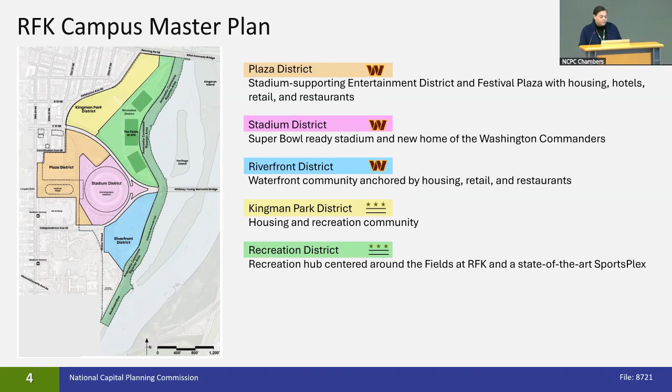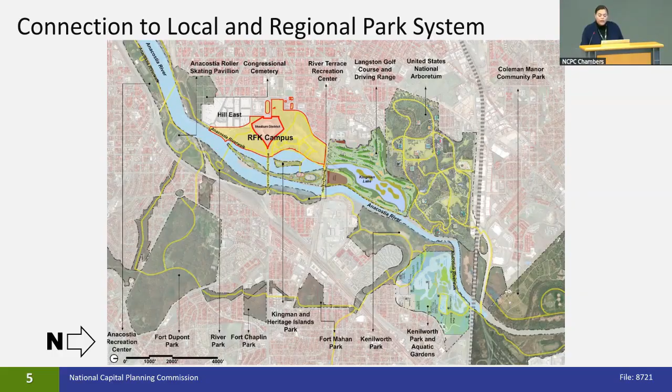The campus is located along the system of NPS-controlled parklands bordering the Anacostia River. The RFK Campus Revitalization Act requires the district to ensure that development does not adversely impact NPS lands and to designate a 200-foot wide buffer along the river as a riparian zone. The stadium project site is approximately 30 acres within the overall RFK campus.

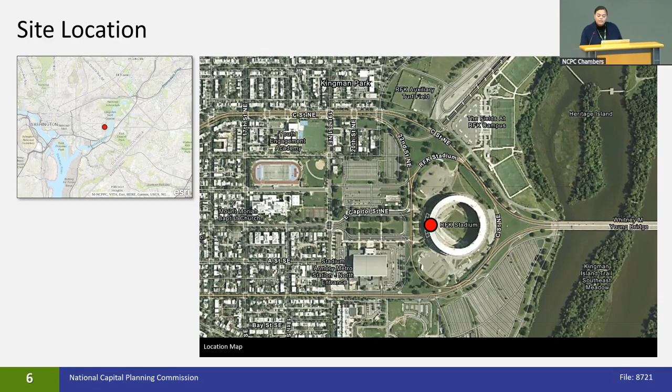NCPC has long recognized the significance of this site as identified in the Legacy Plan, Monumental Core Framework Plan, and the agency's 2006 RFK Stadium Site Redevelopment Study. Of particular interest to NCPC is the project's potential impacts to the system of streets, public spaces, and important view sheds within the L'Enfant City, namely East Capitol Street as a prominent gateway and major axial corridor. Impacts on NPS lands and adjacent federal facilities were also evaluated, along with general consistency with policies set forth in the federal elements of the comprehensive plan.

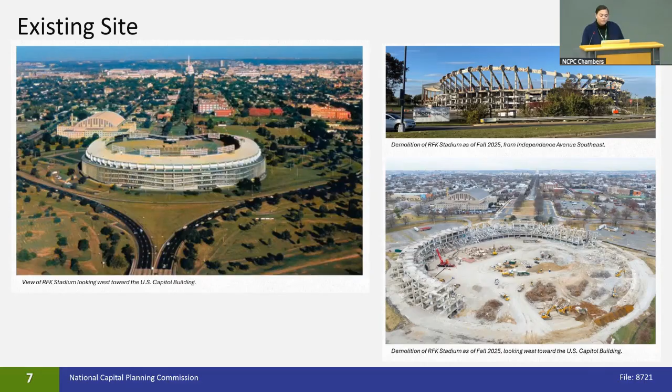The proposed project will replace the original RFK Stadium, which officially closed to the public in 2019. Demolition began in late January 2025 and is anticipated to be complete by the middle of this year. With that, we will dive into the proposed stadium concept. The applicant team has identified several design drivers, which I will walk through over the next few slides.

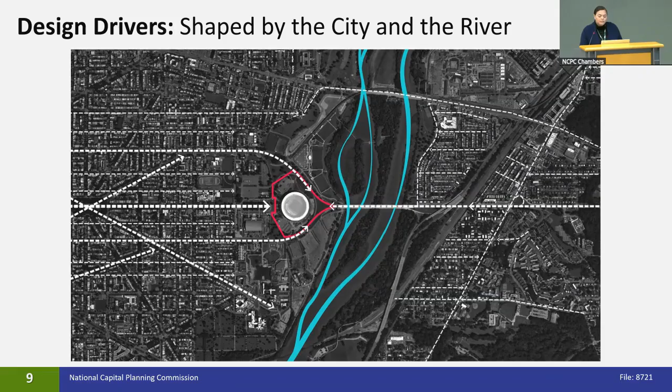First, the landscape strategy bridges the formal historic urban fabric to the west and the river ecology to the east. The site is also meant as a destination and a place to gather for locals and the region.

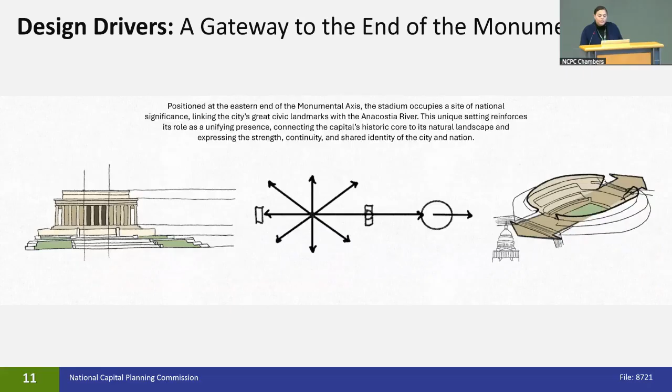The stadium is positioned along the East Capitol Street axis, linking to the Capitol Building and Lincoln Memorial within the monumental core. The roof form raises to the north and south to welcome neighbors and lowers on the east-west axis in deference to the view shed to the Capitol Dome and Washington Monument.

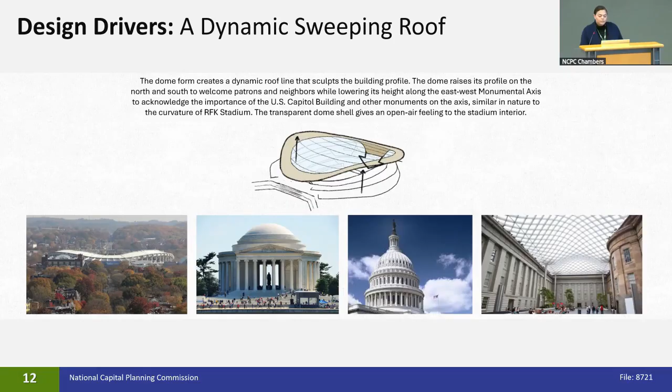It is also similar to the curvature of the original RFK Stadium. The perimeter colonnade and raised podium anchors the building within its setting and reinforces the civic presence. The colonnade is also intended to create a framework that shapes covered indoor-outdoor spaces and allows permeability.

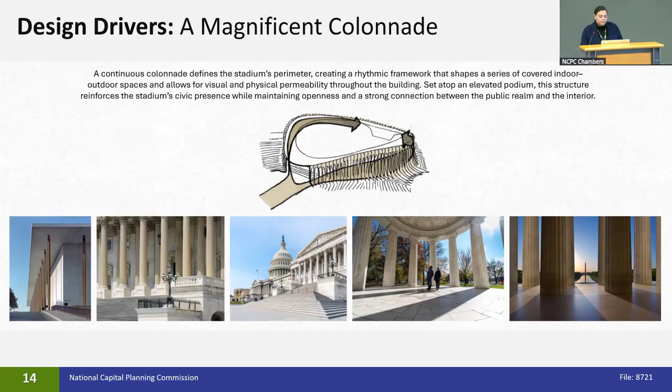The designers envision the stadium as a new landmark in the district that draws from tradition and expresses it through a contemporary lens.

The structure includes several elements that reference the formal architecture of buildings in the monumental core. These elements include the surrounding colonnade, elevated podium, and grand stairways, as shown in this west elevation. Here is the east elevation that will be seen on the approach from the Whitney Young Memorial Bridge.

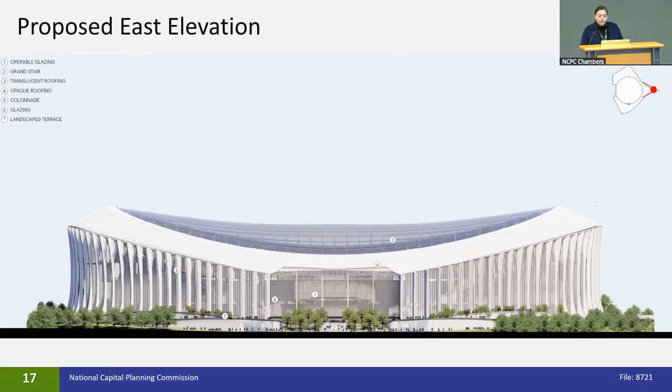While not strictly symmetrical, the applicant notes that the architecture aims to create a balanced composition of indoor and outdoor spaces focused on proportion and rhythm, referencing the colonnades and facade compositions of historic buildings throughout the nation's capital. On the north and south elevations, the podium dips down and the stadium entrances are at ground level with open-air colonnades.

The 1910 Height of Buildings Act permits the stadium to be constructed to a height of 130 feet and allows a dome to extend above that height. The dome roof form varies in height and reaches 195 feet at its highest points.

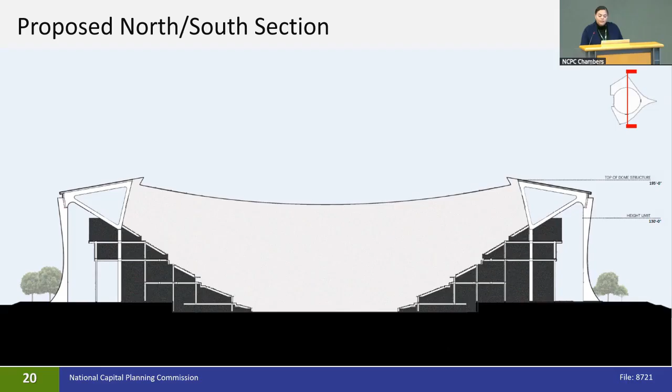This section also shows the open-air colonnades on the building exterior, oriented towards the public plazas and neighborhoods to the north and south. As noted previously, the stadium is located at a prominent Capitol Gateway on a preeminent linear view corridor identified in the comprehensive plan.

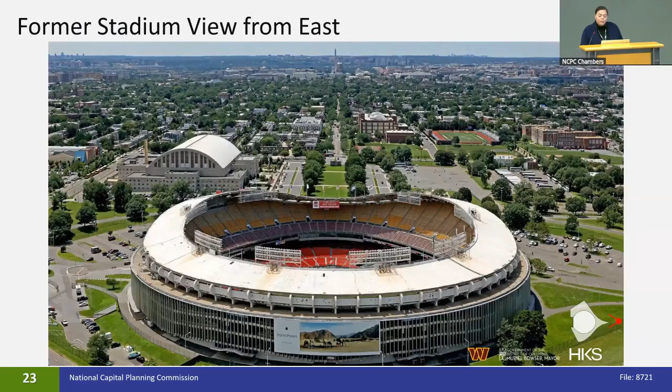However, additional analysis is needed to confirm if the proposed stadium visually reinforces the preeminence of the U.S. Capitol and Washington Monument by protecting the visual frame around them, as outlined in Comprehensive Plan Policy UDB 14.

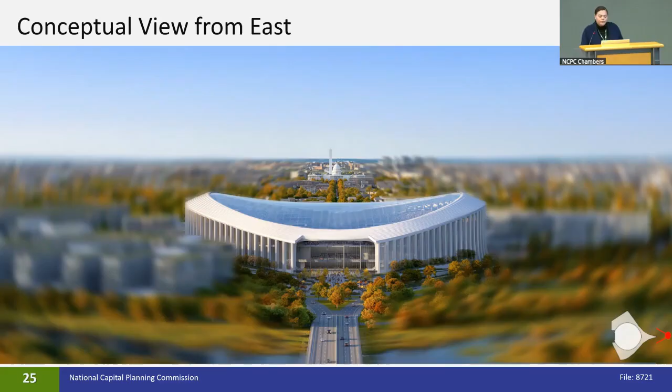As such, staff recommends the commission request additional views of the stadium in context with the next submission, including views from within the site, adjacent neighborhoods, and the river, as well as an accurate long view along the East Capitol Street axis to ensure visibility of the U.S. Capitol building dome and Washington Monument is maintained.

The views should be taken from the higher elevations of the topographic bowl in the Anacostia Hills, where the axis crosses the Civil War defenses of Washington parks.

Regarding lighting and digital signage, the comprehensive plan discusses that lighting can be used to activate public areas and create a more dynamic visitor experience, particularly at sporting venues. However, depending on implementation, digital lighting may negatively alter the monumental core's street atmosphere and night skyline views of iconic national resources. This is also an important consideration in the context of existing residential and future mixed-use neighborhoods.

As such, staff recommends that as the stadium design is developed, the applicant study exterior graphics and lighting approaches that respect the hierarchy of memorials, monuments, and important civic buildings and spaces in the nation's capital, with the U.S. Capitol and Washington Monument the most prominent features in the nighttime skyline, as outlined in Urban Design Element Policy B15.

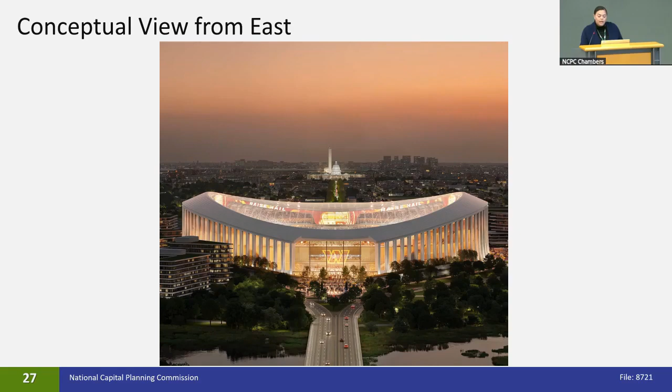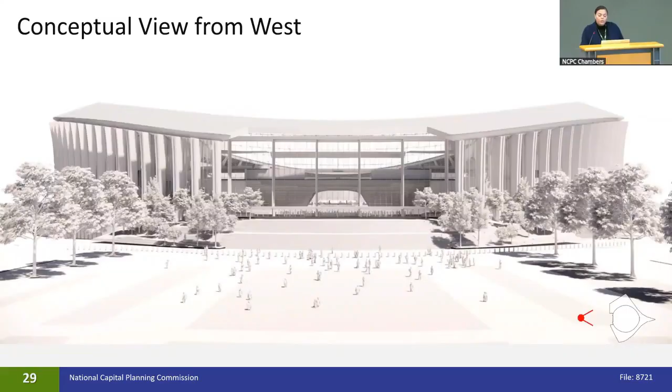The applicant envisions the new roof stadium serving as a venue for sports, arts, and cultural events, creating a year-round activity and entertainment center for district residents and visitors. The stadium will contain 65,000 seats and additional space for 5,000 people standing.

The comprehensive plan encourages programming and placemaking strategies to strengthen the public realm and user experience. At the same time, it guides new development to be compatible with the character of surrounding public space, properties, and community.

The stadium design should aim to create a lively destination with consideration for any potential impacts on the surrounding neighborhoods. Staff recommends the commission request additional information in the next submission regarding proposed building program at street level, planned number of stadium events, plans for tailgating, approach to event noise, and potential interim uses and creative placemaking strategies until new mixed-use development is built out.

The design integrates innovative structural and material components, including the transparent roof membrane shell with a steel cable structure to allow in ample natural light and give the indoor-outdoor feel to the stadium. The material palette also includes concrete ribs and steel girders, fluted glass curtain walls, and operable glass doors.

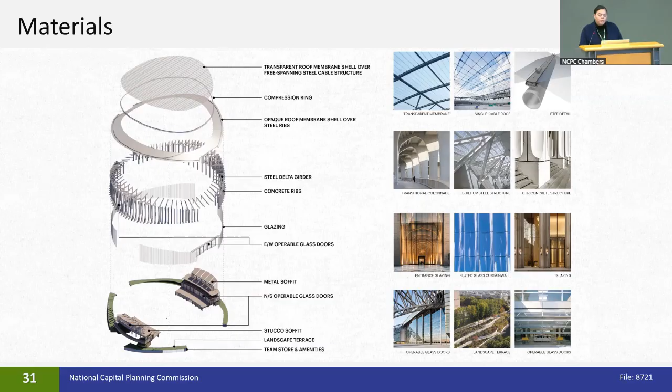As the design is developed, staff recommends the commission request additional site design information in the next submission related to the stormwater management strategy, landscape and planting plans, the design of kiosks and pavilions proposed around the stadium grounds, and the perimeter security approach.

And now we will focus on the initial concepts for circulation and parking. Just for orientation, north is to the right in the next few transportation slides.

A festival plaza is planned outside of the project site at the east end of the stadium, phased to open at the same time as the stadium, providing the primary connection to the Stadium Armory Metro Rail station.

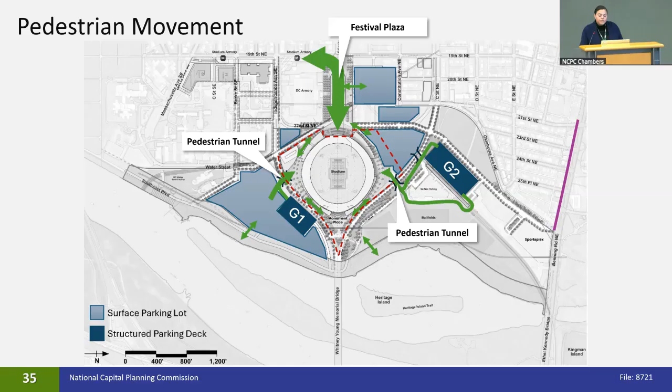Overall, staff is supportive of the concept's approach to emphasize multimodal access to the stadium, including upgraded transit, pedestrian and bicycle infrastructure.

In terms of vehicular circulation, the stadium ingress and egress approach aims to efficiently direct regional traffic to and from 295 and 695. At the time of stadium opening, 2 structured parking garages are proposed to be located to the north and south of the stadium, labeled G1 and G2 on this slide.

These garages will be highly visible in the early stages of the campus redevelopment project, though they will be surrounded by development at full build-out. To understand how these garages may impact views towards the stadium, staff recommends the commission requests the applicant provide the designs of the parking garages in the next submission.

If the designs are not available at that time, information on the heights, massing, and the bulk of the proposed garages should be provided. Further information about how traffic will be managed will be helpful with future reviews.

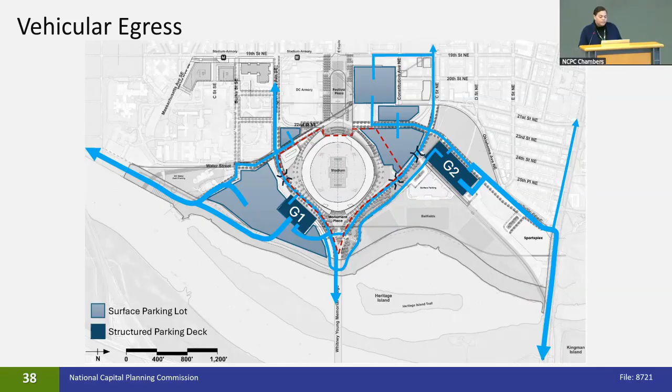To ensure visitor comfort when visiting the stadium grounds, staff recommends the commission request the applicant provide additional information with the next submission regarding accessible circulation routes, wayfinding and signage, and planned improvements to the high-traffic roadways adjacent to the stadium's public spaces.

In terms of coordination, the applicant began community and stakeholder engagement in early 2025, and this engagement is ongoing with the development of the full stadium design and overall RFK campus master plan. Last night, the applicant team held a community meeting to gather feedback on the stadium design concept, which they will summarize in the next submission.

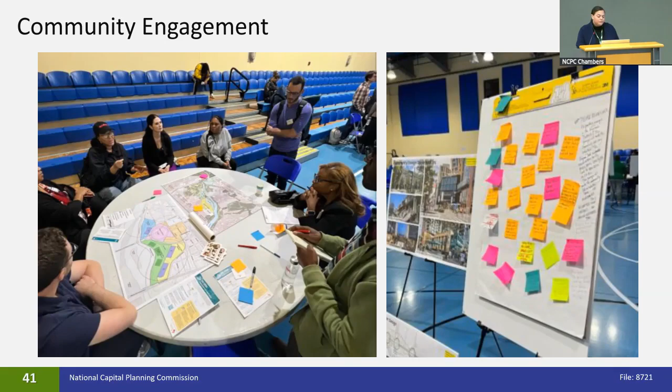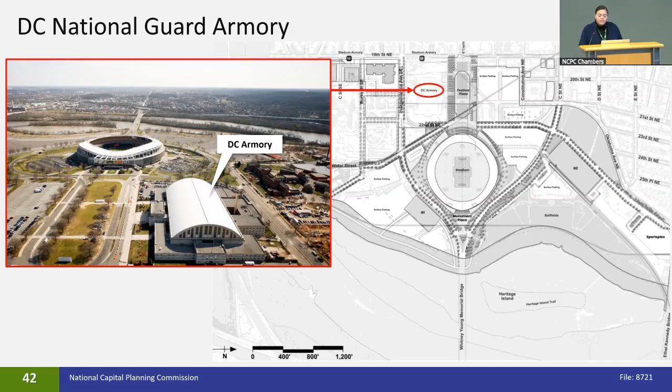Because the stadium site is located directly adjacent to the historic DC Armory, a federal installation, staff suggests the applicant coordinate with the DC National Guard Armory and NPS on the proposed stadium project and master plan, specifically regarding pedestrian connectivity improvements, proposed street redesign along the frontages to the Armory site, and security and operations. Additionally, staff suggests the applicant continue coordination with the National Park Service regarding connections and transitions to the broader Anacostia Park system.

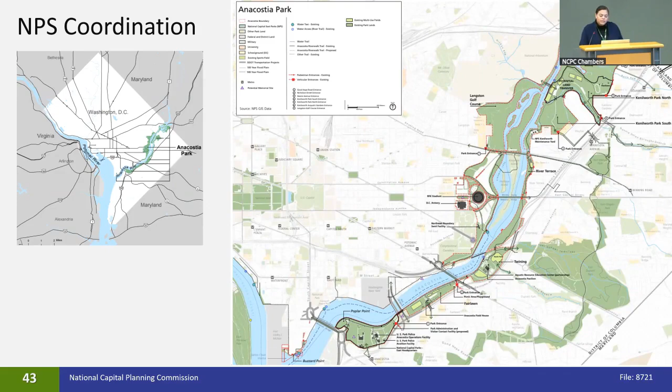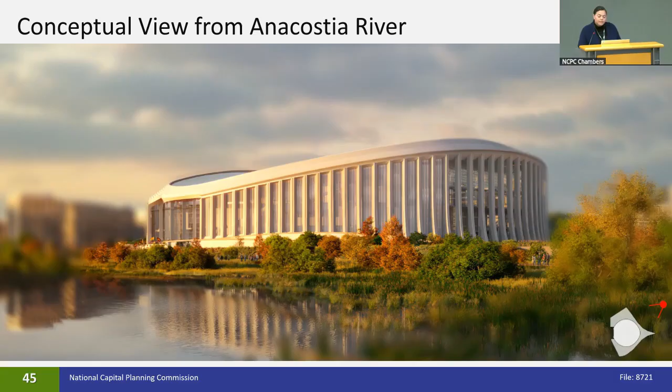In summary, staff notes the conceptual design approach aims to balance innovative stadium design with respect for the site context by maintaining the East Capitol Street viewshed of the L'Enfant plan, referencing the scale, composition, and civic importance of the architecture within the monumental core, integrating the riparian landscape into the site, and echoing the form of the original RFK Stadium.

With that, staff recommends the commission approve the comments on concept plans highlighted throughout the presentation and listed on the following slides, which are intended to support consistency with the comprehensive plan for the National Capital as the design develops.

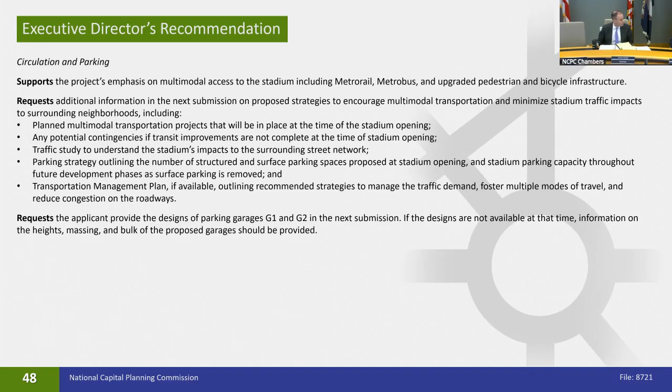Do any commissioners have any questions? Yes, ma'am. So I actually have a long list of questions, actually.

So the festival plazas are, I think, mentioned within the submission as something that would be developed and opened at the same time as the stadium. But there isn't really any information on what those plazas consist of. Can you share a little bit more on that?

Yes, I'm Brian Hanlon, project executive for the RFK PMO, and I'm joined remotely today by Andy Van Horn of the Commanders and Lance Davis with HKS. So I invite Lance Davis to actually respond to your question on that.

Hi everyone, Lance Evans joining from HKS. I have an old friend named Lance Davis, so sorry about that. He's a great guy, he's a great guy.

That's all okay. Yeah, the festival plazas, we're in the beginning stages, Commissioner, of planning the plazas in and around the stadium and the public realm. And we will be following up with more information on those in our next submission.

Okay, I had a similar question about the parking structures. And I know that the staff report is already requesting additional information, but I would just note for anything that is going to be implemented as part of the stadium district, it should be coming in as a package so that we have a full understanding of all of the moving parts and pieces and a good idea of what the landscape will include as a whole. And I know that the other pieces will come as the master plan and the NEPA continues, but the pieces associated with the district are important.

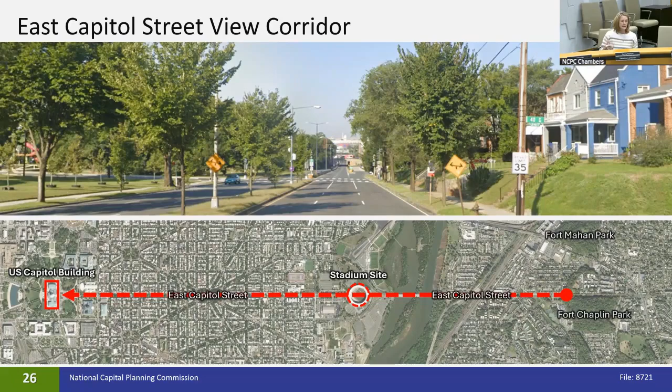My understanding is this is for more than just football, that it's a versatile, flexible facility that allows for festivals, concerts, events, and other sports. Can you help me understand, not down to the technical detail, but how you would transition from something like football to maybe tennis or soccer?

Yeah, the infrastructure of the stadium on the event level is large enough and flexible enough to allow for the transition of the football playing surface to other surfaces, whether for soccer matches or conventions. We also feature retractable seating in the lower bowl that allows for configurations for various events such as concert stages and other ancillary entertainment.

Okay, great. Last question, more of a technical question related to its height. I know it's proposed at 195 feet and 130 is allowable with the exception of the dome. Is there a limit on the dome from a zoning perspective? I know the height is regulated, but I'm curious about the dome height.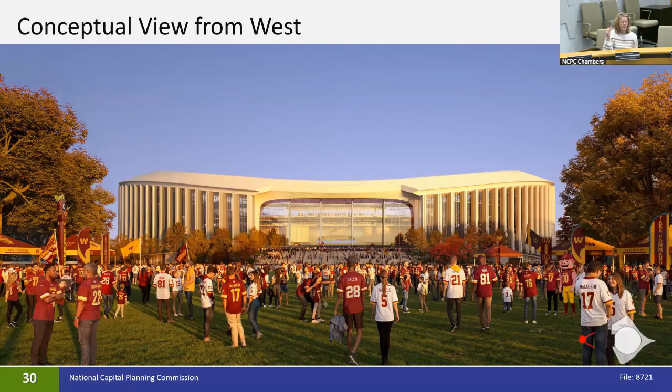There has been a determination by the zoning administrator, and that letter is on the DOB website, but we will share it in our next submission. We'll describe the technical language that defines the height points, so we can share that in our next submission. But the view of the DC government is that the stadium is compliant with the Height of Buildings Act. Is that correct? That's our current view, yes. Okay, thank you very much.

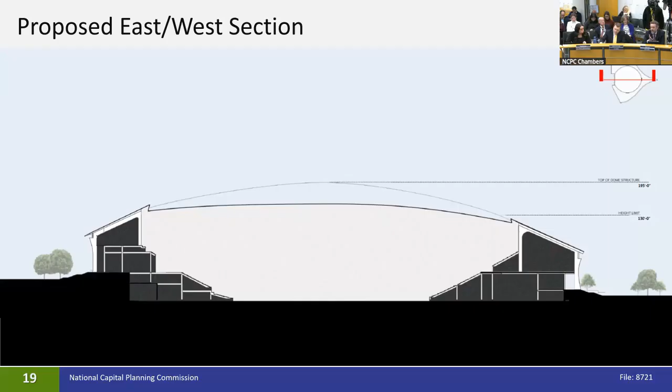I noticed during the presentation there was talk of possible future expansion of the infrastructure of Stadium Armory Station. I do want to commend that there's not a third parking garage on the map in the presentations we'll be getting. But is Oklahoma Avenue now kind of off the table? Is that more of a WMATA question, or is Transportation Planning Board and COG looking at that? For those who don't know, there was originally a plan for an Oklahoma Avenue station long ago that would have served the Kingman Park neighborhood. It never happened, but there's still room to do it. So I'm wondering, is the view now that we're just going to look at expanding Stadium Armory and not adding a second station?

Yeah, I guess I would say that's a WMATA question, and we'd be happy to share whatever we can in the next submission. They're underway with the study. And just to supplement that, there is a BRT station that's planned for 2030.

I'm not going to poo-poo BRT. All modes of transit are great, but I think that having that metro station, when we're looking at the volume here, anyone's been to the ballpark on a game day, it's a lot.

The other question I had was, I think a lot of the renderings are really cool, but we didn't see any of the ugly side of the stadium, and I know there's got to be one. If you've ever been to 6th Street at Capital One Arena, or somewhere they're loading in all the stuff that's coming in, somewhere there's the food service, somewhere there's all of these things. If you've been to the ballpark, there's sides that don't look nice.

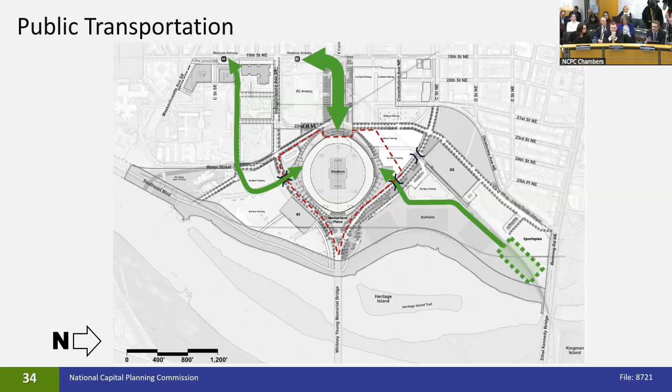Somewhere around here, that's got to exist, and I haven't seen any of it yet. So I don't know if you can even give an opinion on, is it going to be on the west side? Is it going to be on the east side? Is it going to be adjacent to the ugly parking garage? Where is the ugly side going to be, and when can we see it to see what you've done to mitigate it?

Yeah, there is no back door to the stadium, commissioner. It is envisioned as a 360-degree accessible piece of civic architecture. The stadium infrastructure access is actually located on the north side of the site, adjacent to the G2 garage that you see on the screen now. And then from there, we go underground, under the public realm, to the event level of the stadium.

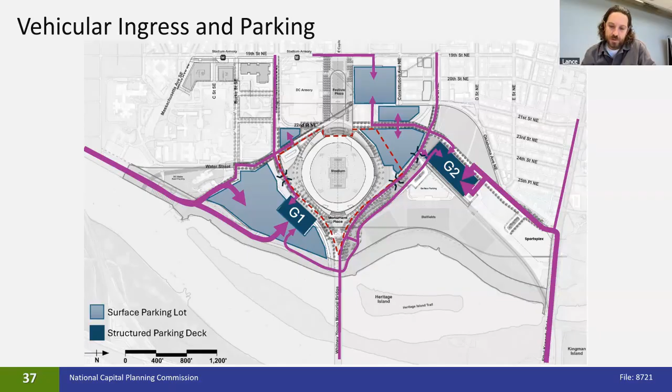So the intent is that the stadium infrastructure, the movement of goods and services in and out, is actually concealed from the public realm. It's going to be kind of like the new tunnel that was built with the visitor center on the Capitol, where you're routing everything under so you don't actually see any of that back end anymore. Okay, thanks. That's helpful.

Interesting. Are there any other questions, Paul? Quick question. Chairman? Thank you for the presentation. Mr. Chairman?

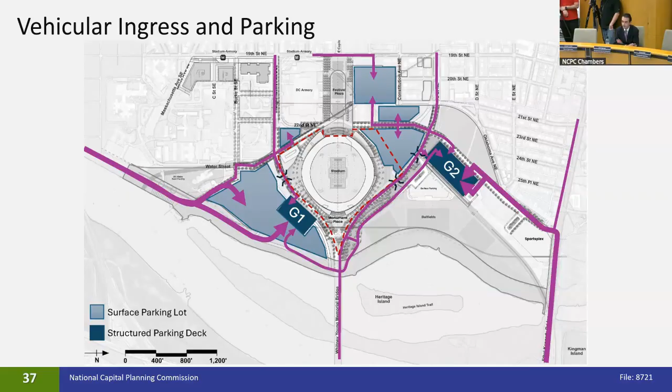As far as the architectural style, we appreciate, realizing it's not a federal project, still appreciate the references to classical architecture, to the historic characteristics of the neighborhood. To the extent you're able to incorporate more historic classical design into particularly the colonnade and the entrance, just to convey a sense of heft and gravity when people enter, I think that would be a good recommendation. And even with the surrounding landscape, to the extent you're able to incorporate more of those elements, I'm interested in hearing a little bit more about the historic references being considered for this design.

Yeah, I think for us, the stadium is inspired by the city and the district, and the neoclassical style and architecture is synonymous with the city itself. Rather than replicating individual pieces or components of the style, what we really valued were the principles of the architecture itself. So a design that has a clarity of form, a balanced composition, the use of colonnades to create a rhythm and order to the design, and the use of entries and axial connections to create a visual hierarchy for the guests as they come into the building.

The stadium does sit on an elevated base, which is reminiscent of examples found throughout the capital. The siting of the stadium along the monumental axes and how it expresses and establishes those view corridors and connections and links with the L'Enfant plan was very important to the architecture and foundation of the stadium's design. But for us, the idea of the true value of looking back, to define a path for our future, is where we've landed with the architecture.

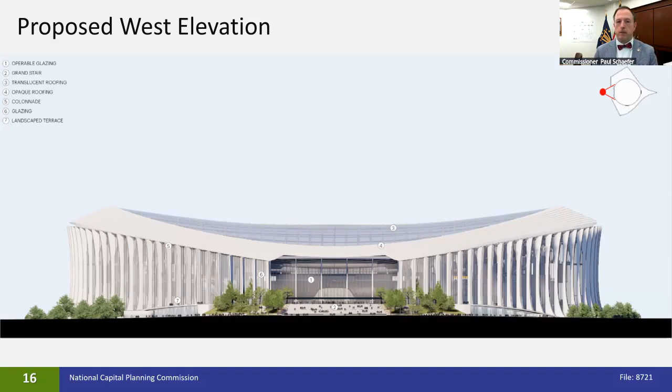My question, what's the roof made out of? What's the actual material? I saw the description, but I'm just trying to understand what that stuff is.

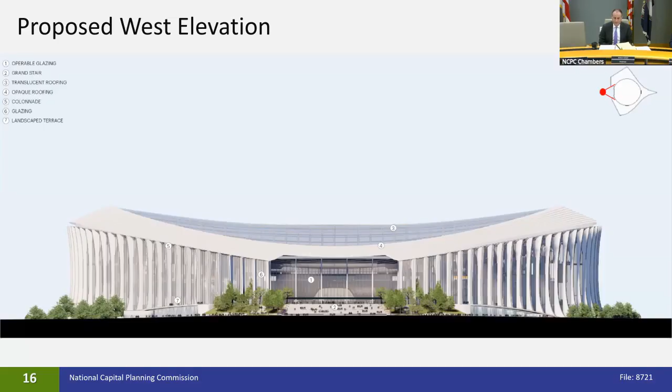There are two materials under consideration right now, Mr. Chairman. One is ETFE, a transparent membrane or plastic film. It's the same material used in US Bank Stadium for the Vikings and the stadium in Los Angeles at SoFi. There's an alternate material on the market called Viewscape, which has similar properties to ETFE. We're evaluating which is the right choice, but they're both membranes.

How do you keep them clean? Each one of these comes with a maintenance program for the roof. Essentially they have a high slippery coefficient—that's not quite the right word—but basically when it rains, they're self-cleaning. It does still require monthly access. Interesting.

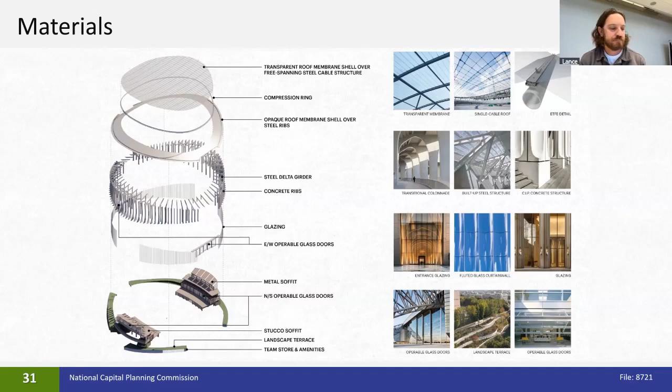Any other questions before we proceed to public comment? One last question.

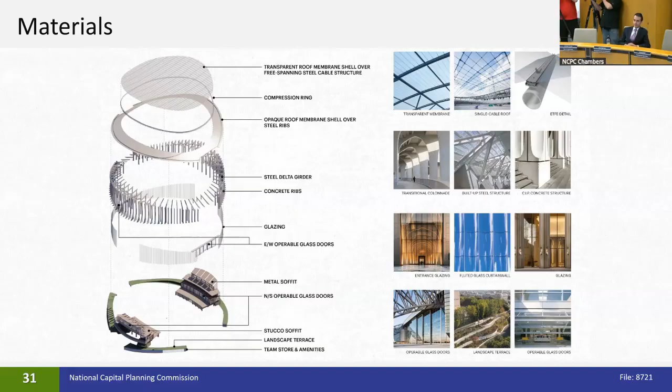The plaza—do we have an idea what the material will be for that? Is it stone like the surrounding plazas, or consistent across the entire stadium? What color? Do we have any details about that? We're just beginning the journey into the hardscape and softscape strategy around the site, Commissioner, so we'll follow up on that in our next submission.

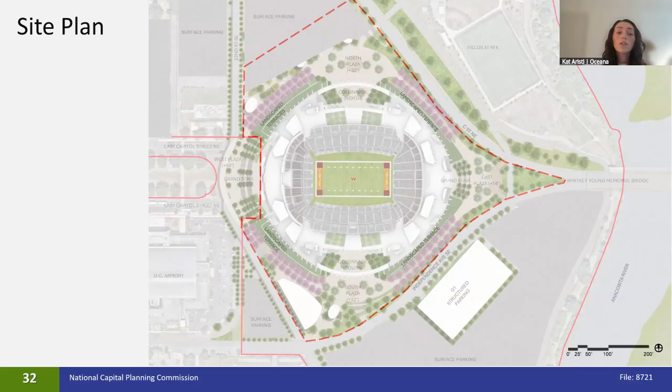Reuse systems work. They are designed so that packaging and foodware can be reused multiple times for their original purpose in their original form. A single reusable cup can be used more than 100 times, greatly reducing the amount of single-use plastic that's incinerated or landfilled.

A 10% increase in beverage and bottling companies implementing reusable cups across the US would save an estimated 432 million cups from entering aquatic ecosystems. That is the scale of the impact we're talking about.

Requiring reusable cups at the new stadium would also help protect the Anacostia River, one of only 3 rivers in the US that the EPA deemed impaired by trash. Every single-use cup prevented from entering the waste stream is one less item that can end up in this already polluted river. And this is not just an environmental issue, it's also a financial one.

Litter cleanups cost the US an estimated $11.5 billion every year, with about 20 billion pieces comprised of disposable food serviceware. Reducing the amount of single-use plastic cups at stadium events will save the district money that can be saved instead of spent cleaning up unnecessary waste.

DC would not be alone in taking this step. Stadiums and arenas across the country are moving to reusable cups. Levi's Stadium, home to the 49ers, and Arrowhead, home to the Chiefs, both committed to implementing reusable cup programs this year, including at this weekend's Super Bowl.

After a reusable cup pilot program at Crypto.com Arena in LA, home of the Lakers, Kings, and other teams, eliminated 23,000 single-use cups in 2 nights, the arena established reusable cups as a permanent fixture in the venue. Here in DC, many concert venues are already using reusable cup systems. Reuse is not theoretical, it is happening, it works, and it should be a priority at the new stadium.

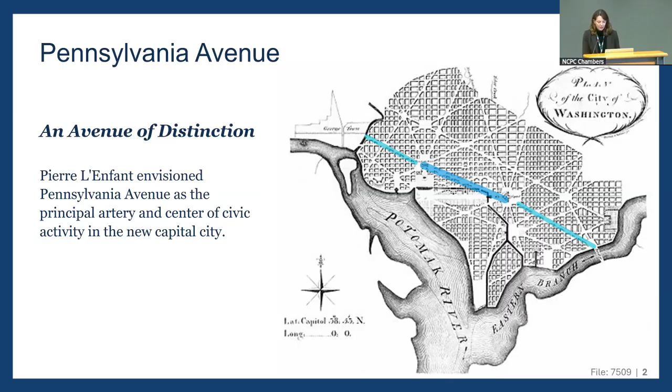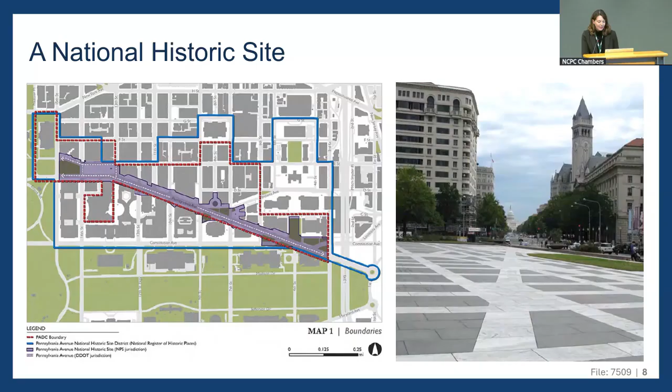Historically, the Avenue has served as the nation's venue to celebrate, commemorate, and recognize social, cultural, political moments and events. It's where we've collectively mourned, gathered in the name of justice, and come together in celebration of some of our most important achievements. And every 4 years, it's the site of the presidential inaugural procession. It's more than just a city street. The Avenue is a cultural resource. The Avenue and its surrounding area are home to many historically significant buildings, statues, memorials, parks, and landscape features. Its symbolic character and national ceremonial role contribute to the significance of the Pennsylvania Avenue National Historic Site.

Over time, the Avenue has gone through periods of renewal and decline, from L'Enfant's People's Promenade to a bustling commercial center, to an office district, to a car-focused landscape, and today in disrepair and lacking vitality. The Avenue's most recent renewal was in the early 1970s when Congress created the Pennsylvania Avenue Development Corporation, or the PADC. As one of the first public-private partnerships in the country, PADC was a quasi-federal agency that oversaw all aspects of management and operations.

PADC was responsible for planning, regulation, development, maintenance, public space improvements, and event programming. To carry out these duties, it prepared a master plan in 1974, which shaped the Avenue as we see it today. In 1996, after the plan was substantially implemented, Congress dissolved the PADC and divided its responsibilities among the General Services Administration, the National Park Service, NCPC, and the District of Columbia government. Each agency worked independently, often without dedicated funding, leaving no single organization in charge of the Avenue. Over time, this contributed to deferred maintenance, declining real estate values, and its perception as a lackluster destination. It also left in place the 1974 plan, which is now over 50 years old.

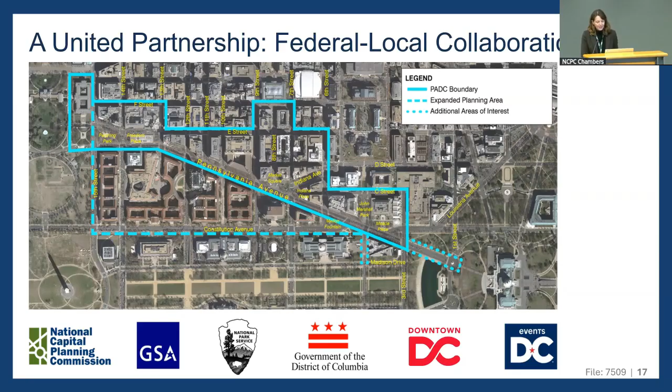NCPC, General Services Administration, National Park Service, the district government, Downtown DC BID, and Events DC are working together to create a new Pennsylvania Avenue plan that will replace the outdated 1974 plan. Our 87-acre planning area includes the avenue's 1.2-mile stretch between the White House and the Capitol and 40 acres of adjacent public space. The team is also looking beyond the formal boundary to improve connections to its terminus at the Capitol and between the Avenue, the National Mall, and the heart of downtown.

When complete, the new Pennsylvania Avenue plan will be a usable and comprehensive document that will guide decision-making and development for decades to come. Two consultant teams are leading the development of the new plan. David Rubin Land Collective is leading the Public Space Master Plan, which is a physical public space plan that will address the alignment and configuration of the street and public spaces and the infrastructure needs to realize the vision of the avenue as a venue. David presented to the Commission last June, and we will be back in April, hopefully, for concept review.

HR&A Advisors is leading the implementation program, which is a management framework that addresses programming, administration, operations, and maintenance, all critical to the avenue's use, upkeep, enjoyment, and long-term success. Their work is integrated into the Public Space Master Plan. The consultant teams are working closely together and with our project partners at both the senior executive and technical staff levels, as well as with NCPC's internal planning and design staff.

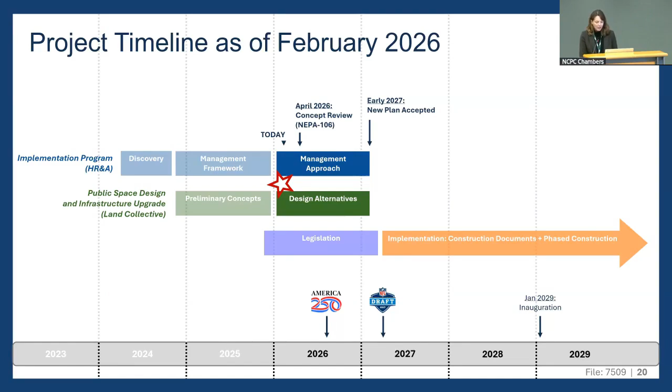Looking at our timeline, we will begin commission and regulatory reviews this spring. Once we begin, we have a year to complete design development and the required documentation. This year includes going to NCPC and the Commission of Fine Arts for review, comment, and ultimately acceptance of the new plan. After the plan is accepted, some elements will require legislative action before implementation, after which another entity will lead final design and construction.

Closer look at our timeline. I mentioned April—we anticipate coming back to NCPC for concept review then, which would put us around October for preliminary review, and final review in early 2027, with Commission of Fine Arts reviews on a similar schedule.

There will be opportunities for the public to share feedback along the way. All NCPC and CFA meetings are public, and we will host additional public meetings as part of the regulatory process following our concept and preliminary reviews.

This is a very exciting moment, the beginning of a once-in-a-generation opportunity to invest in infrastructure improvements and set the stage for implementation. As we've seen, the status quo is not working. The avenue is not functioning the way it should to fulfill its national role. With this plan, we have a design opportunity to address infrastructure and create a world-class venue, and a management opportunity to facilitate the changes needed to successfully steward the avenue for decades to come.

Mr. Chairman, that concludes my presentation, and the NCPC team is here to answer any questions the Commission may have.

Thank you for that, Karen. I think you really summed it up best—the status quo just isn't working with respect to Pennsylvania Avenue. Do any commissioners have any questions?

I'm interested in knowing, once you go a little more granular, what are some of the key problems you're trying to solve in the new plan?

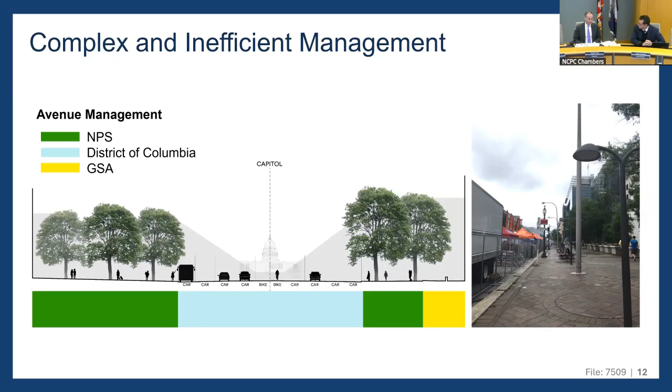It's complicated. You've got a 107-foot wide street, 4 traffic lanes each way, plus bike lanes. This is the landmark street in our nation's capital, and it's essentially unusable for many events, or we have a lot of trouble using it for many of the events we would want to use it for.

You walk along Pennsylvania Avenue, and you've got these flower pot bollards, which are not an ideal security measure and also look like heck. The trees are all dying. What I've been told is that underground you have a morass of utility projects dating back to the Civil War. It's just a mess, and I think it could be a lot better—but I'm sorry to jump in the place of staff here. That's a good summary.

It is a good summary. It's a combination of physical needs and this management structure that we're hoping to simplify, to really make the avenue something that's very usable for more people. It's a regulatory flub-a-dub—it's like a bunch of different animals combined together, and what you end up with just doesn't make much sense.

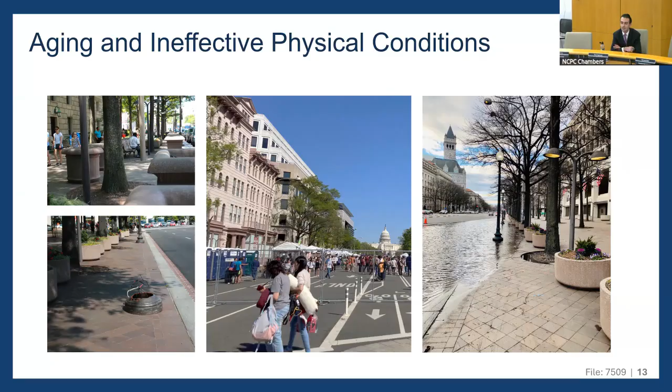Paul, quick question. I think one of the most noticeable issues—and I think this is a very important project, I appreciate this presentation, this is great—in terms of, maybe you could talk a little bit more about what design principles or goals do you have to improve walkability in this area? I know walking down this avenue, a lot of these structures are aging. There are a lot of dislodged bricks, and when you have a snowstorm it just makes things even more compromised. So I'm wondering if that's a focus for you, improving our walkways, making sure everything's nice and smooth and flat, and there aren't dislodged stones and stuff. What exactly is your focus on that?

Sure, so this is a bit of a teaser for April. When we come into concept review, we'll be sharing those design intentions and ideas. But the foundations we've shared previously with the commission—this is a shorter, summarized version—there's a lot of different uses we need to accommodate within the roadway and the sidewalks, and the design team is taking a really holistic look to make sure we accommodate as many uses as possible, make it as efficient as possible, and also make it as beautiful as possible.

The 1974 plan really gave us what we see today, and that's been out there for a very long time, so we're past due for a refresh. We are looking at prioritizing the framed view to the Capitol, looking at the configuration of the roadway so it accommodates pedestrians, vehicles, bicycle loading, ride share, all the things you need on a city street, but also still retaining that sense of grandeur, that ceremonial function.

We've been working closely with—maybe the Avenue's most unique design requirement outside the IndyCar is the inaugural parade—so we've been working a lot with the Military District of Washington to make sure anything we propose for the sidewalks and roadway supports their needs. Looking at event use, we have everything from the barbecue battle to an IndyCar race to the cherry blossom festivities. So there's a range of different sizes of events we're considering, and how best to look at moments where we can upgrade infrastructure to help service those areas.

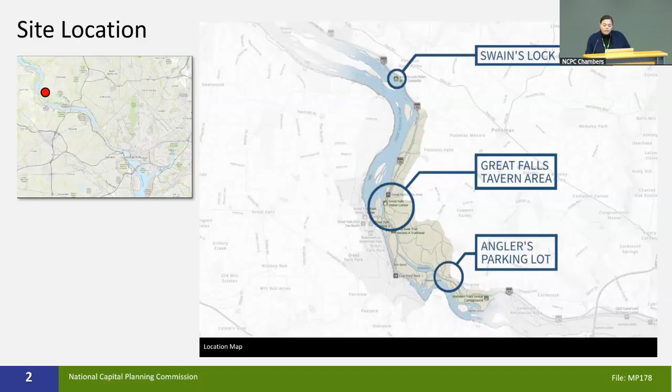Today, the National Park Service will provide an informational presentation on the development concept plan for the Great Falls area of the Chesapeake and Ohio Canal National Historical Park in Montgomery County, Maryland. The Great Falls, Maryland planning area is located northeast of the Potomac River. Parklands along the southern shore of the Potomac River, located in Great Falls, Virginia, are administered by George Washington Memorial Parkway and are not included in this effort.

As background, the NPS process for park development includes several stages.

Management plans, such as the Civil War Defenses of Washington Management Plan, are the earliest stage in the park planning process and typically cover a broad area, providing high-level guidance. Later stages include development concept plans, which develop major park elements, such as this plan and the reimagined Anacostia Park Development Concept Plan. Then project design of specific elements is conducted, and finally, construction and implementation.

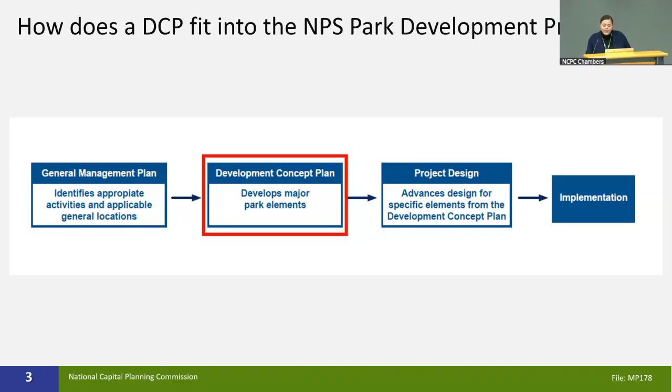Once specific projects included in the Great Falls Development Concept Plan are identified for implementation, they will be submitted to NCPC for further review. And with that, I will turn it over to Andrew Landsman, NPS Chief of Resources Management.

Hello. Thank you for having us here to share the results of recent National Park Service planning efforts for the Great Falls area in Potomac, Maryland, within Montgomery County.

The Chesapeake and Ohio Canal National Historical Park preserves a 184.5-mile historic canal corridor along the Potomac River, stretching from Georgetown in Washington, D.C. to Cumberland, Maryland. Once an important 19th century transportation route for coal, lumber, and agricultural goods, the canal now offers visitors opportunities to enjoy recreational and educational experiences that connect them to the region's history and landscape.

The project area centers around the Maryland side of Great Falls and is the most popular area of the park, which itself is one of the most visited national parks in the country, with over 5 million annual visitors.

We undertook this plan so we could ensure that the park was continuing to meet visitor needs into the future, provide high-quality recreational and educational experiences, and preserve our amazing natural and cultural resources. This plan was developed in coordination with partners, stakeholders, and the public, and offers a shared path forward for the Great Falls area.

I'll turn it over to Christine Bruins with our regional planning team to share more information about the plan. Thanks, Andrew, and thank you, Laura. Today, our plan is public, and we have been working on it for a couple of years now, and we're excited to share what we're up to.

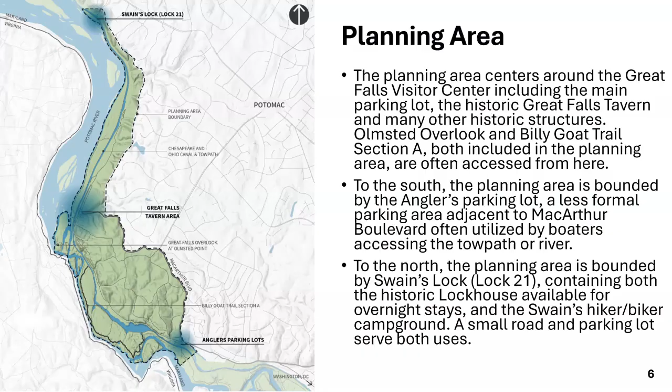The plan purpose had 4 main goals: to look at strategies to promote resource stewardship, to continue to provide safe, high-quality national park experiences, to have appropriate ranges of facilities and services to meet the visitors, and to proactively engage with the partners, stakeholders, and the public.

This plan is very high level and programmatic. The recommendations range from small scale and very specific, such as water filling stations at targeted areas, to larger actions such as adaptive reuse of the historic structures located throughout the site. All of the recommendations in the plan are in service to the Park Service's goals of promoting safe and enjoyable opportunities for recreation and stewardship of resources.

This plan is not an environmental assessment. It does not have any sort of design element, and there's no preferred alternative. We will come back with discrete actions following.

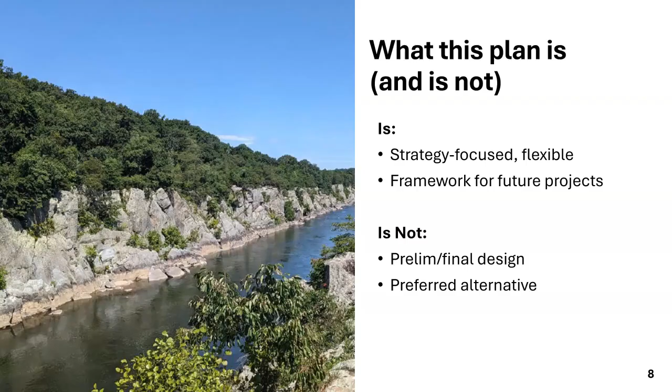The plan is centered around the main issues and opportunities we have at the site, which includes managing the high and growing volume of visitation. And what that means for us as recreation managers is evaluating the use and capacity of our facilities and infrastructures and how that supports visitation.

We're looking at social trails throughout the areas. We're looking at put-in and takeouts to the rivers and the canal and the trails between them.

We're looking at potential for new concessions, whether it be food or recreational outfitters, and we're looking at the management of overnight campsites and lodging. We're also charged with preserving the 19th century canal infrastructure and protecting natural ecosystems of the area.

The plan also looks to reduce injuries and fatalities, of which there are a large number, and to ensure more timely access for emergency response and search and rescue teams to areas. The plan also looks to improve parking, traffic, and related safety issues.

We want to increase accessibility of the core experiences in the site. And then we are looking to find suitable uses for all of the historic structures on site, many of which are vacant or underused.

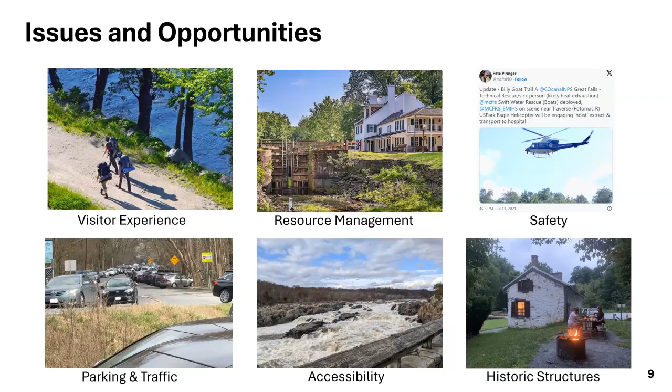So we had two comment periods. The first was broader level. We wanted to touch base with our visitors and find out how they're using, what's working for them, what's not working for them, what we need to consider as we move forward. And in the second planning period, we asked more targeted feedback about what we're proposing along the Billy Goat A Trail, which is where a lot of the recommendations in the plan go. And then also specifically where we're going to make changes to access to the Potomac River.

There are no formal river take-in or put-outs, and so we asked our public where they use and where they would like to see that infrastructure. So we received a lot of feedback from long-term visitors, from people who volunteer with our search and rescue crew, from anglers and paddlers, just a diverse group of people, and their feedback was incorporated into our planning effort.

The recommendations are, again, programmatic, but we're looking at physical and operational interventions to improve safety and crowding along the Billy Goat A Trail. We're looking to improve safety by formalizing some of these access points, and we're looking to formalize some social trails and close others for resource management and visitor safety reasons.

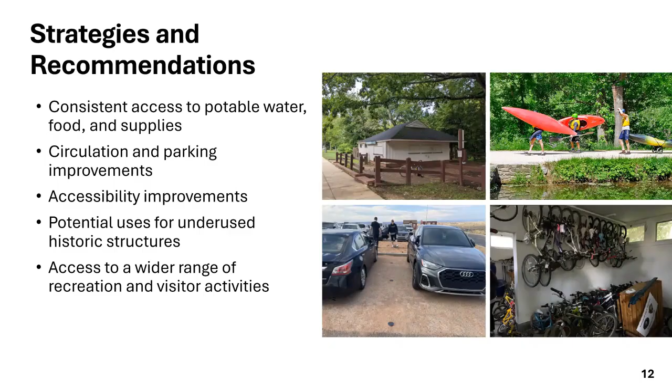There's also a number of recommendations that are specific to making the visitor experience better. One of the primary concerns is making sure there's consistent access to water, food, and supplies. We're looking at improvements for parking and access from Montgomery County into the park site. And then again, finding appropriate uses for some of the structures on site that could also accommodate the recreation that visitors are seeking.

We'll be back when we have more detailed designs for implementation. The C&O Canal is going to continue to work with Montgomery County Fire on first response, some of the safety issues on site and coordinating first response. They're also working with Montgomery County Traffic Department on the access road and some connections between MacArthur Boulevard and the park. And we'll continue to seek funding for some of the larger scale design and construction projects.